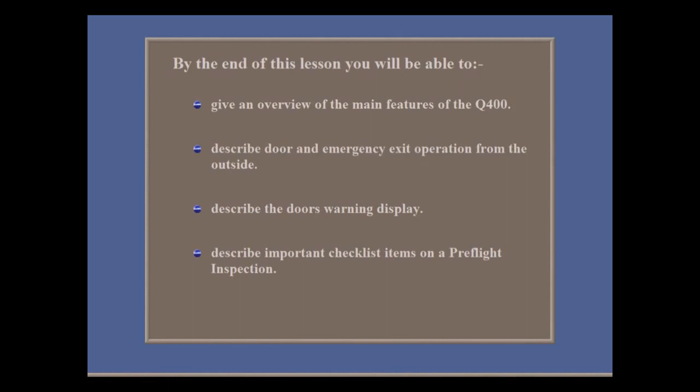Dash 8, originally from de Havilland and now from Bombardier of Canada, is a short to medium-range turboprop, carrying 37 passengers in the 100 series and the 200 series, 50 in the 300 series, and 72 in the new 400 series.

The latest in the family, the Q400, entered service in 2000, uses the powerful Pratt & Whitney 150A engines, has a VMO of 286 knots at 18,000 feet, and a max altitude of 25,000 feet.

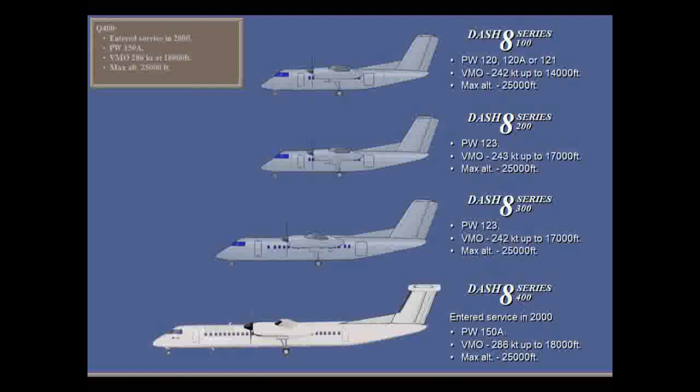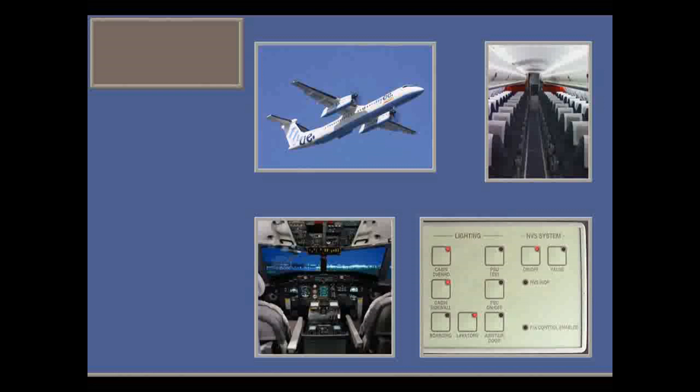It uses state-of-the-art technology for increased speed, comfort and capacity, and environmental performance, but keeps the economies of a turboprop. The Q400's active noise and vibration system makes cabin noise levels lower than those aboard most modern jets.

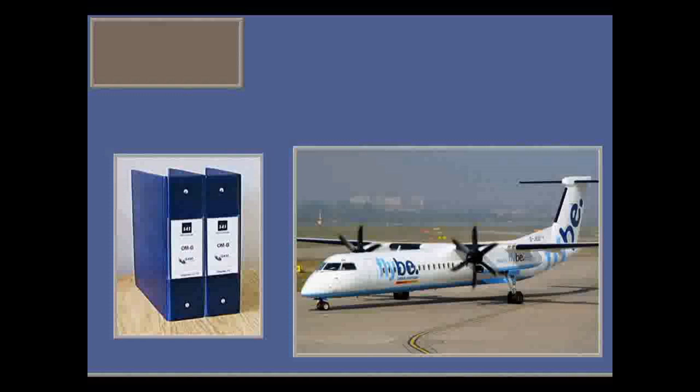This multimedia computer-based training covers the Q400 with commonly installed equipment and options. Your aircraft may be different, so check your manuals and procedures carefully. In this lesson, we'll give an overview of the Q400 from the outside. In the next lesson, we'll step inside.

Let's look at the aircraft structure, starting with the pressurized area enclosed by the forward and aft pressure bulkheads. The nose section houses the nose gear and other unpressurized equipment. The weather radar antenna is in the radome.

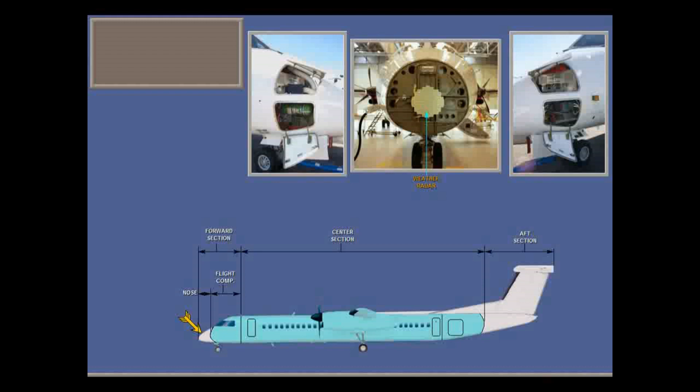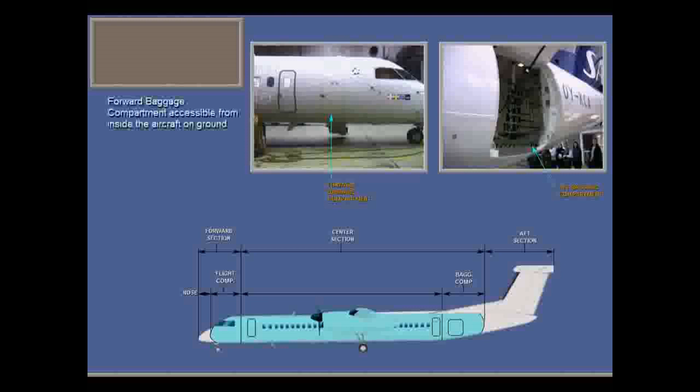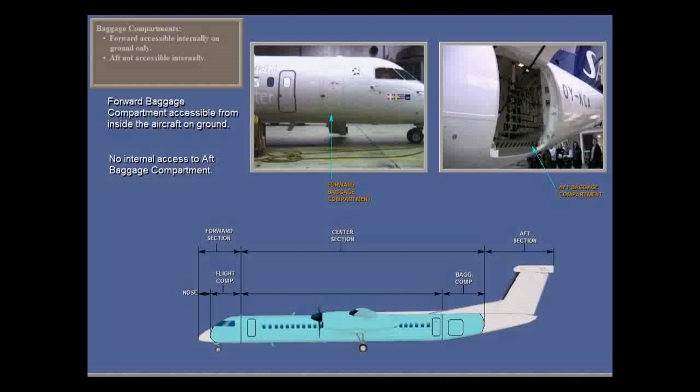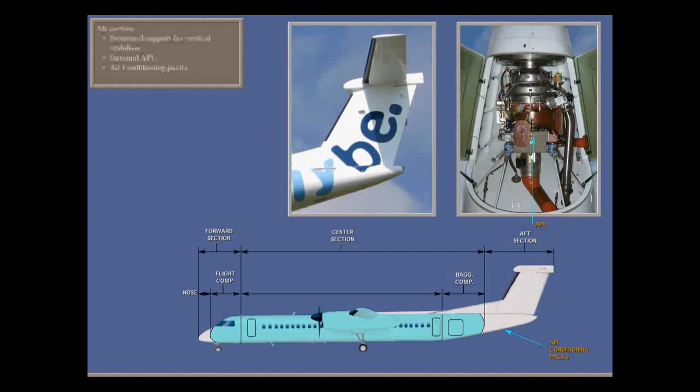There are two baggage compartments, a small forward and a larger aft compartment. The forward can be accessed from inside the aircraft on ground, not in flight, but there is no internal access to the aft compartment. The aft section has structural support for the vertical stabilizer, contains the optional APU, and the air conditioning packs. The avionics rack is located next to the wardrobe in the forward cabin.

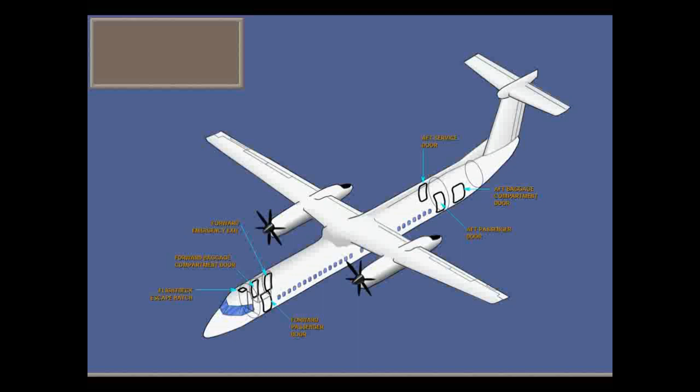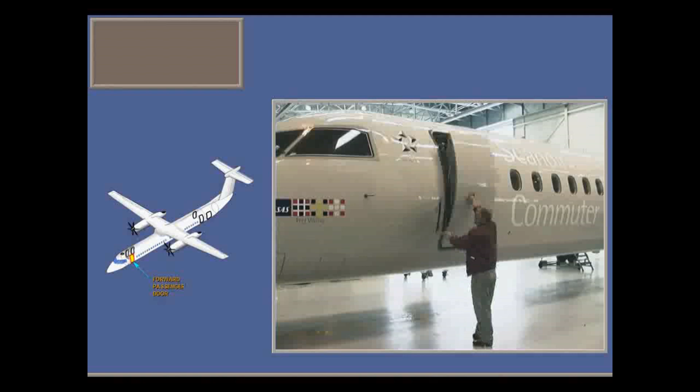You open the forward passenger door from the outside by pushing to release the handle and pulling, guiding the stairs gently down, helped by the door counterweight.

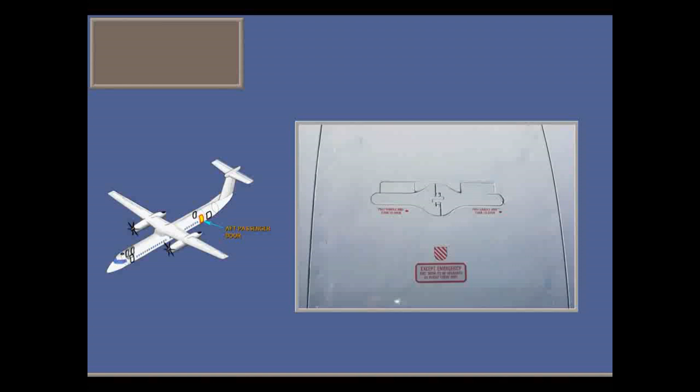The aft passenger door opens outwards and forwards. Press the upper flap covers to release the winged handle. Turn the handle counterclockwise and pull the door forwards, engaging the locks. Then push the handle in, flush with the fuselage. The lower vent door is automatically opened by the main handle.

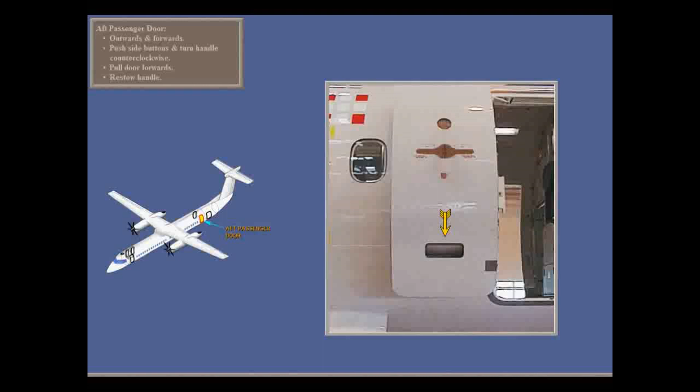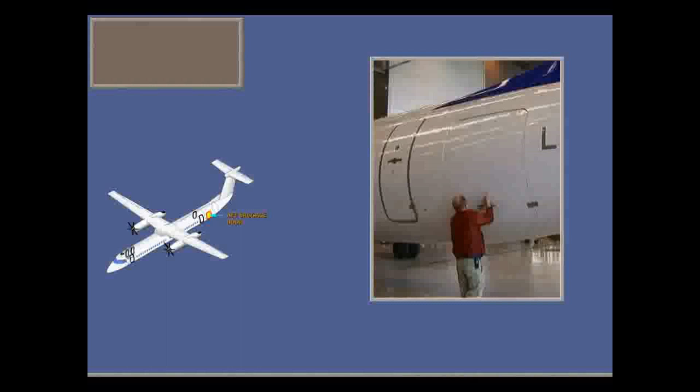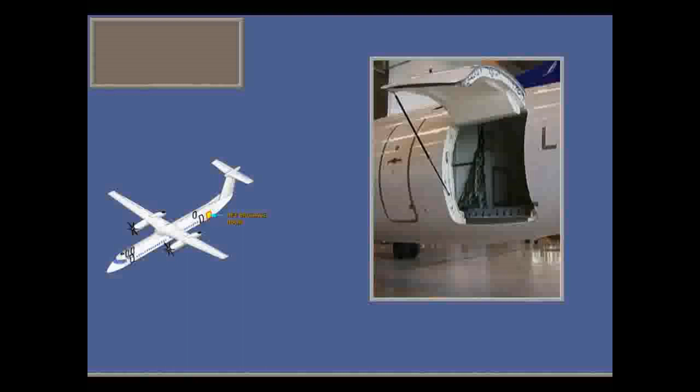You operate the aft baggage compartment door handle in the same way. A counterbalance mechanism assists movement. Secure the door in place like this. Now you can release the bar holding the baggage net. The aft service or galley door is not very exciting, as it's similar to the aft passenger door.

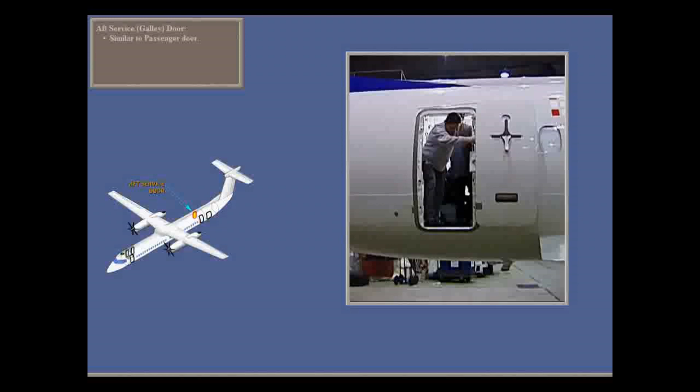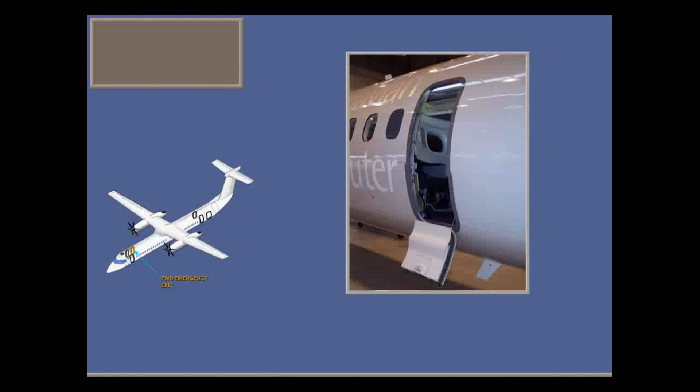There are no center emergency exits, just one emergency exit at the forward right side. It can be opened from the outside, opens outwards, and has a lower section to be kept closed when ditching on water. The forward baggage compartment door also opens like the aft passenger door.

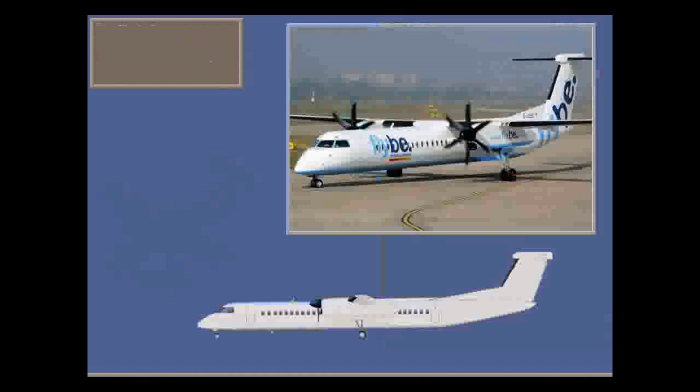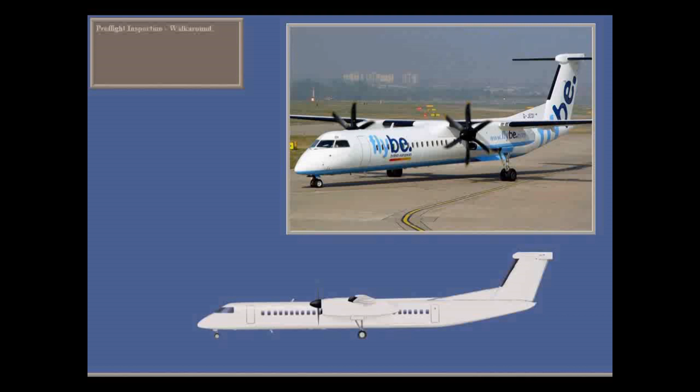Let's carry out a pre-flight inspection, perhaps more detailed than normal, to give you an overview of the Q400. You should check the general condition of the fuselage for signs of wear, damage or leaks, and check all doors. Starting at the antennas, look for anything unusual. If the forward passenger door is closed, check that it opens freely.

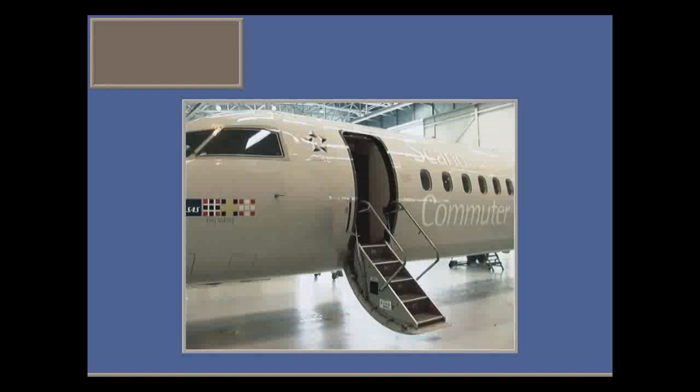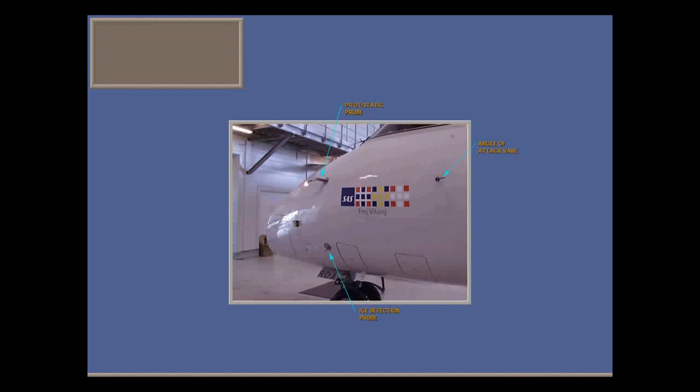Is the angle of attack vane, pitot-static probe and ice detection probe clear? Take care, the angle of attack vane may be hot. Check the windshields, wipers and side panel for cracks and condition.

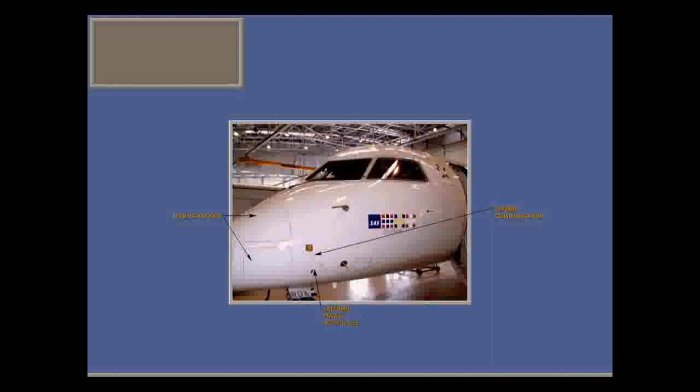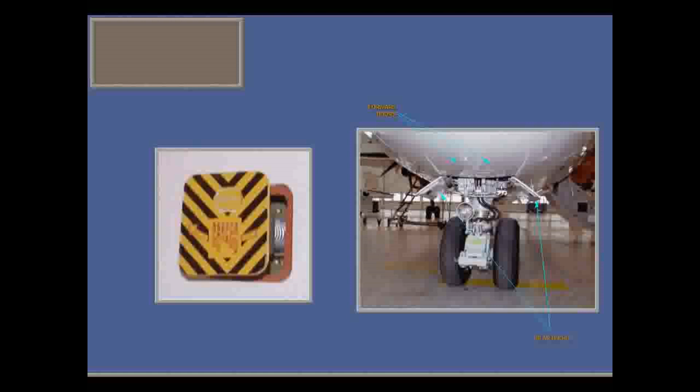Are the nose bay doors, ground communication and external power doors closed? Focusing on the nose gear, is the ground lock engaged? Are the nose gear doors and state of the wheel well normal?

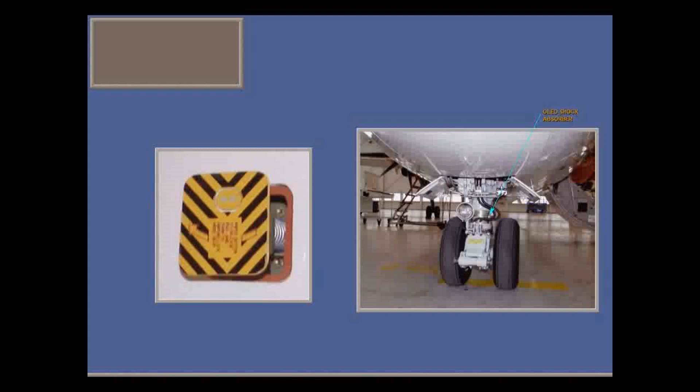What about tyre pressures and general condition? And length of the oleo shock absorbers? Make sure that there are no signs of leaks. Is the taxi light clean?

Moving to the right side, is the radome clean? Is the green oxygen discharge disc in place?

Then carry out the same checks on doors and probes. However, there is also a standby pitot-static probe.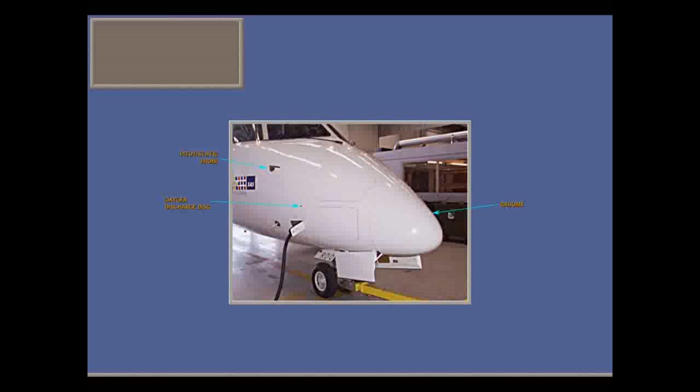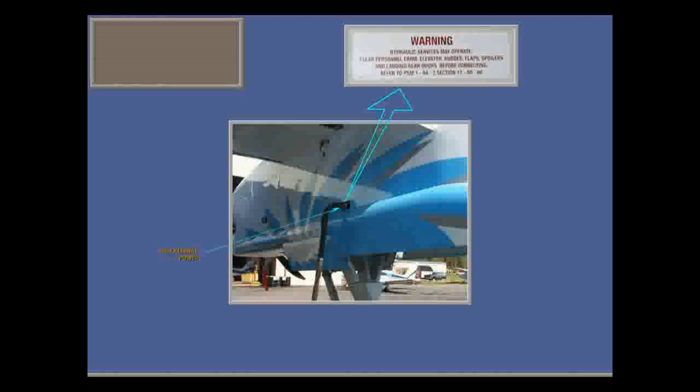Is DC external power connected? If it is, take care near hydraulic consumers, especially the landing gear doors, as they can suddenly operate.

Are the forward baggage compartment and emergency exit doors closed? Check the forward emergency exit light and wing inspection lights.

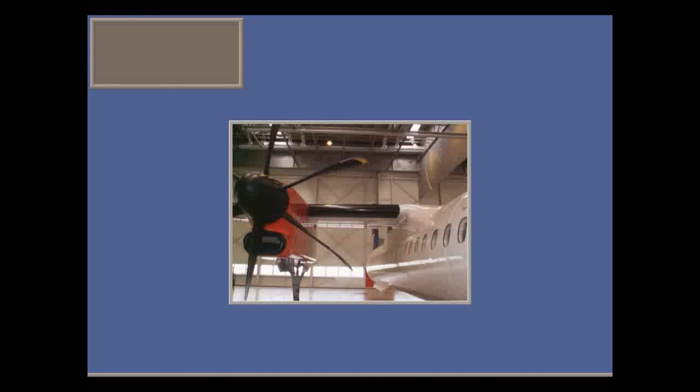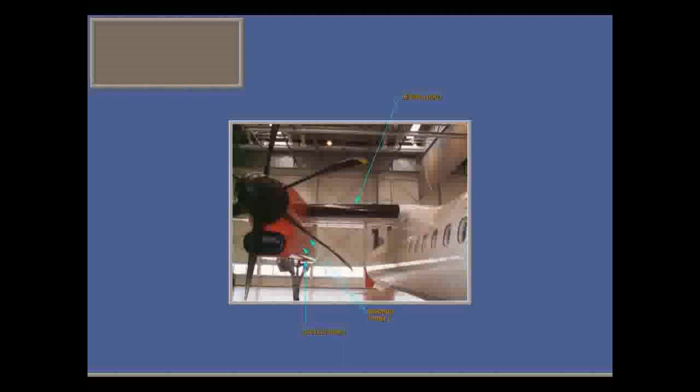On the right wing and engine nacelle, is there any damage to the inboard de-icing boot? Are the engine inboard panels, oil cooler door and cowls secured? Are the nacelle drains clear?

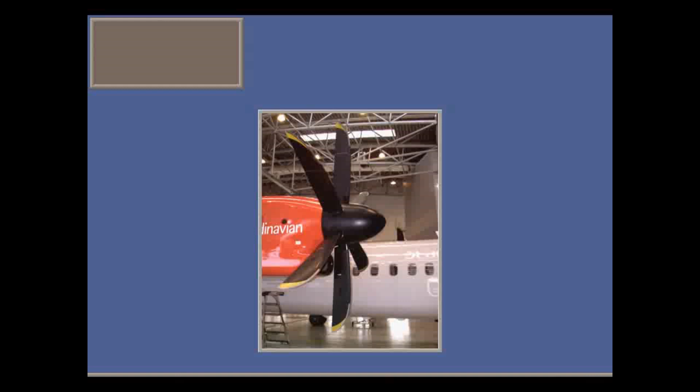Check the propeller blades and spinner for marks. Make sure they rotate freely, but don't twist the blades or move them fore and aft, as this may cause the prop seal to deteriorate.

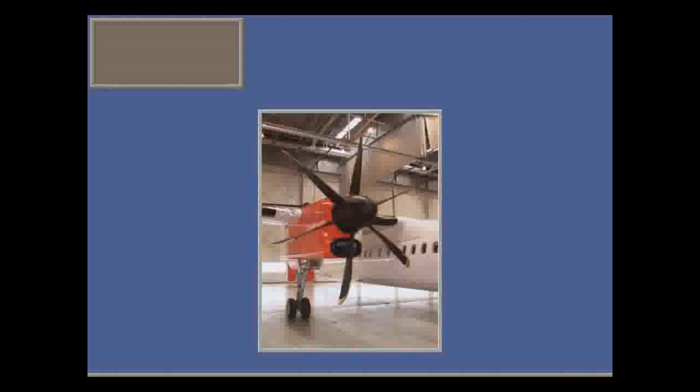Is the engine intake free of foreign objects and leading edge clear? Are the outboard panels, etc. okay?

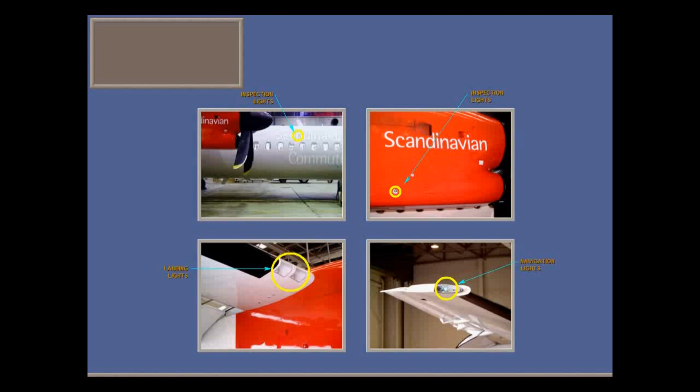On the wing, are the inspection lights, landing lights, wingtip and navigation lights clean? Inspect the outboard de-icing boots.

Are the outboard magnetic and water drains secure? And are the NACA vents clear?

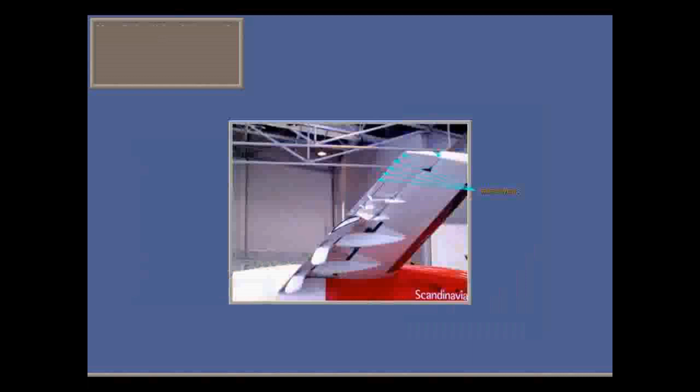Walking to the back of the wing, do you still have 6 static wicks? Does the aileron and its geared tab look normal? How about the outboard flap?

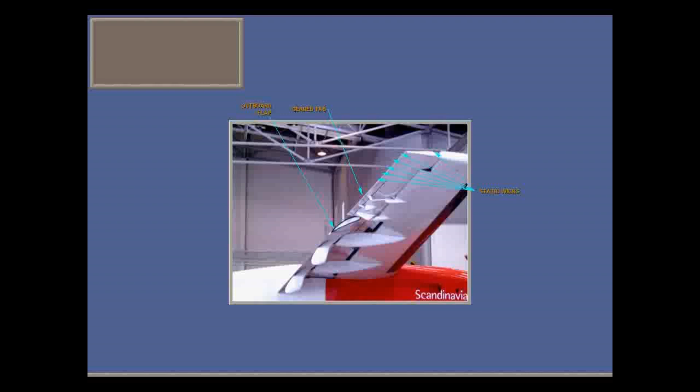Make sure that the refuel panel door is closed.

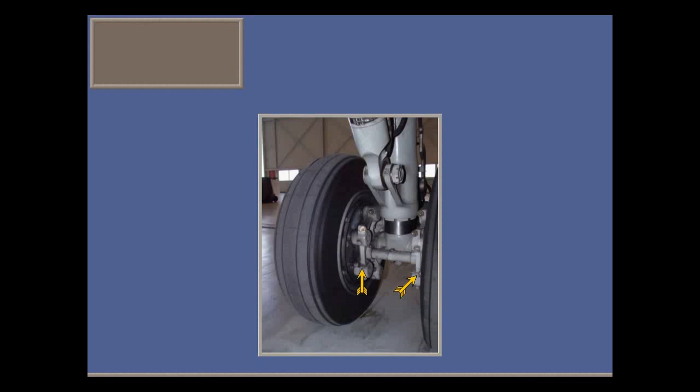Now let's look at the right main gear. Check the general condition. Check the tyres, the brake wear indicators, and the oleo. Remove the main gear lock pins.

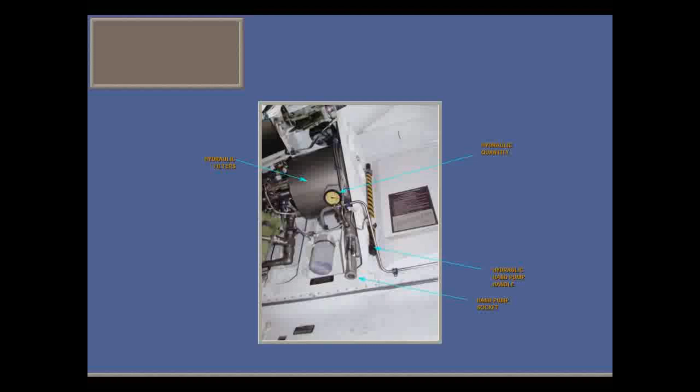Check the hydraulic quantity and filters and that the pump handle is stowed. Remove the main gear door pin.

Does the inboard flap look okay? Check the hydraulic accumulator pressure indicator. Minimum pressure for dispatch is 1500 psi.

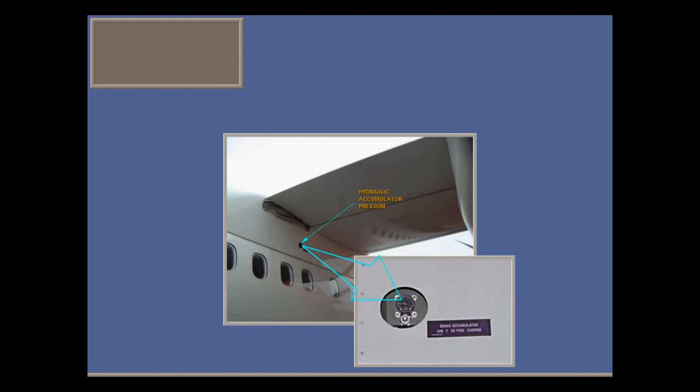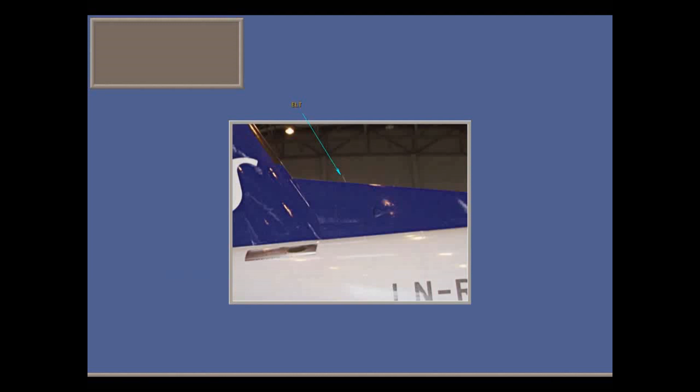Continuing to the aft fuselage, check that the air conditioning access door is closed. Check the ELT antenna and the air conditioning NACA vent.

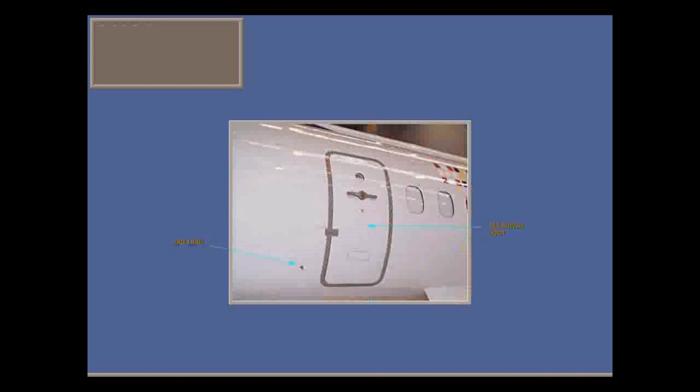Measure the strake to ensure that it's still the correct length. Check the aft service door and its emergency exit light. Is the rear fuselage access door closed?

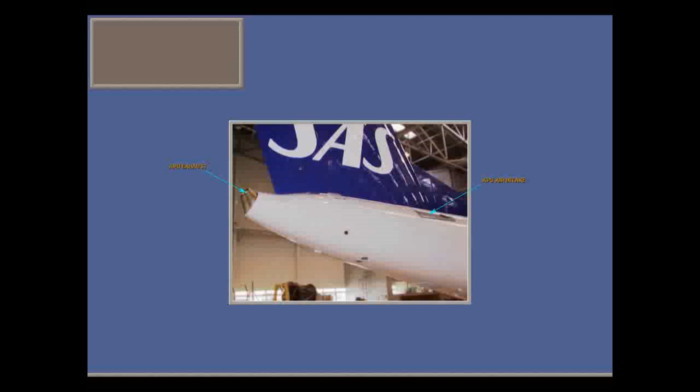If an APU is installed on your aircraft, is the APU intake clear? And is the exhaust clear? Check the APU drain mast.

Looking up, inspect the general condition of the horizontal stabilizers and the vertical stabilizer, in particular their de-icing boots. Check the elevator and rudder and their static discharge wicks.

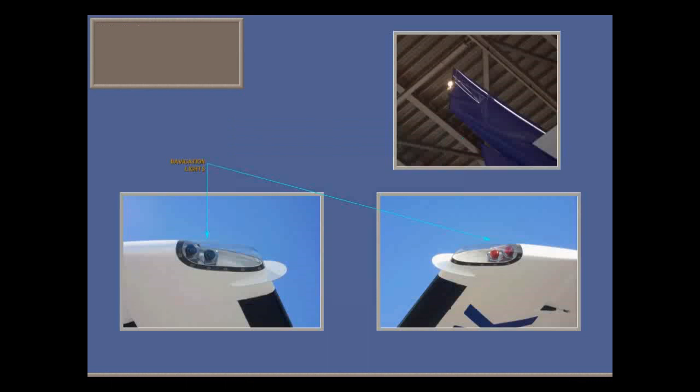Are the navigation antennas OK? Do the navigation lights and the aft position lights look OK?

Moving round to the left aft fuselage, is the aft baggage compartment door properly closed? How about the aft passenger door? And is its exit light clear?

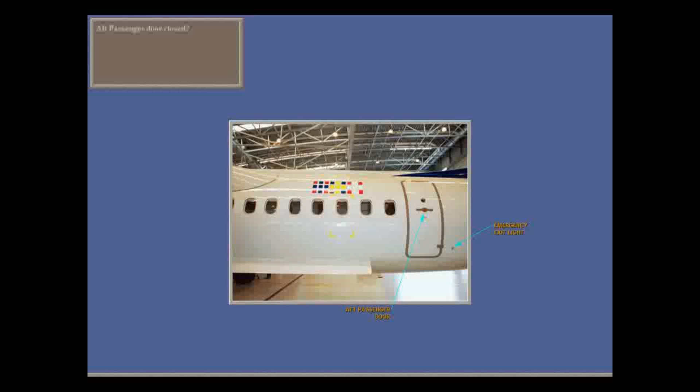Is the outside air temperature detector clean? Does the strobe light look OK?

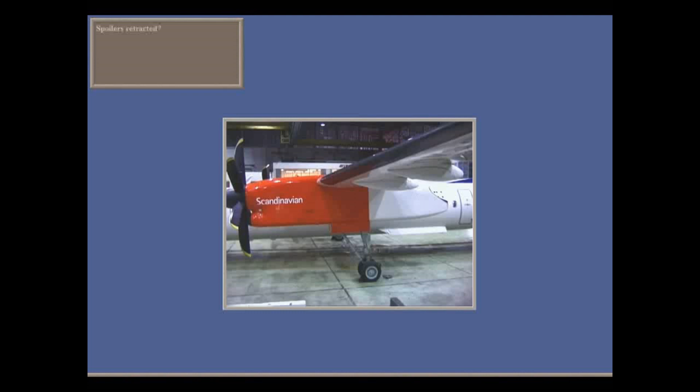With the finishing post in sight, examine the left wing and nacelle. Are the spoilers retracted? Is the engine exhaust clear?

Make sure that you carry out checks similar to the right side on the left engine nacelle, left main gear, left wing, and left propellers.

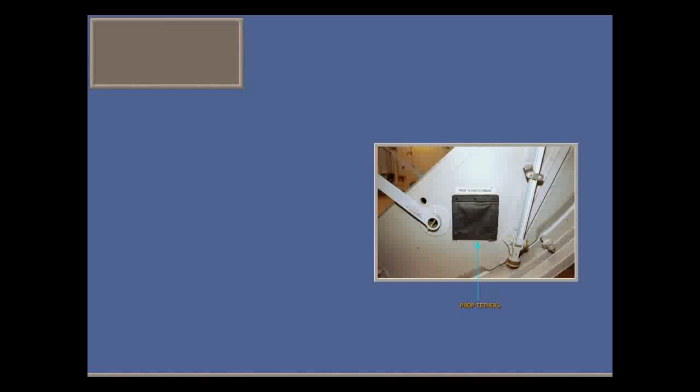On the passenger stairs pockets, are the prop tethers stowed or on the props? And are the main landing gear lock pins in the front pockets when they should be in place on the gear?